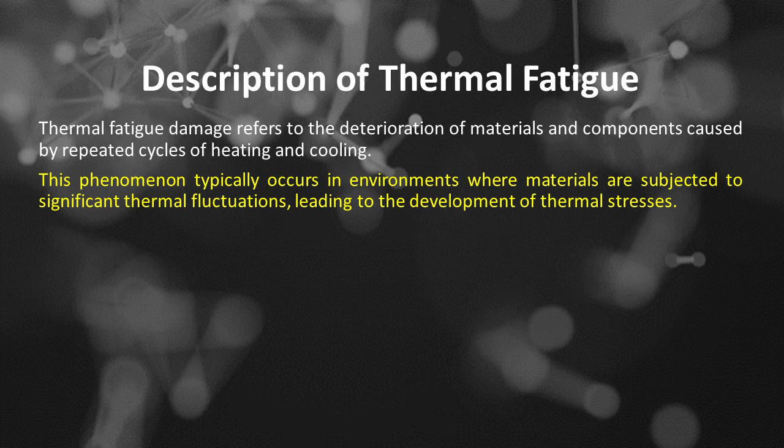Thermal fatigue damage refers to the deterioration of materials and components caused by repeated cycles of heating and cooling. This phenomenon typically occurs in environments where materials are subjected to significant thermal fluctuations, leading to the development of thermal stresses. As materials expand when heated and contract when cooled, the repetitive nature of these expansions and contractions can result in the formation of microscopic cracks and other structural weaknesses.

Key characteristics of thermal fatigue damage include: Number 1 is crack formation. The dominant feature of thermal fatigue is the growth of cracks, which may initiate at points of high stress or defects in the material. These cracks can expand over time, ultimately leading to structural failure.

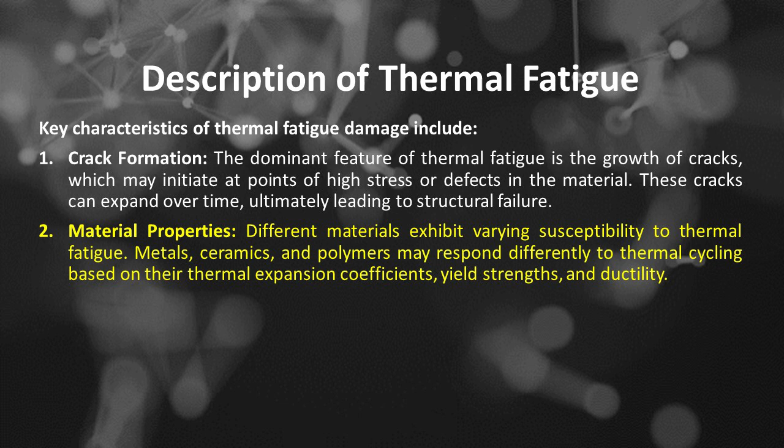Number 2 is material properties. Different materials exhibit varying susceptibility to thermal fatigue. Metals, ceramics, and polymers may respond differently to thermal cycling based on their thermal expansion coefficients, yield strengths, and ductility.

Number 3 is temperature range. Thermal fatigue is particularly significant in applications where materials experience high temperatures, such as in engines, turbines, heat exchangers, and various industrial processes. Number 4 is thermal cycling.

The frequency and magnitude of thermal cycles significantly influence the extent of thermal fatigue damage. Frequent and intense cycling can accelerate damage accumulation.

Number 5 is environmental factors. Other factors, including oxidation, corrosion, and mechanical loading, can exacerbate thermal fatigue damage, particularly in harsh operating conditions.

Number 6 is loading pattern. Repeated cycles of loading and unloading, rather than a single, monotonic loading, increase the likelihood of thermal fatigue damage.

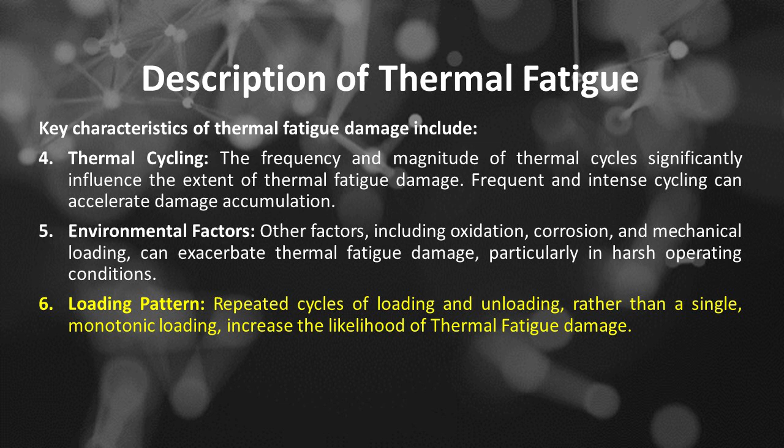Number 7 is frequency and duration. Higher frequency and longer duration of temperature fluctuations can accelerate material degradation.

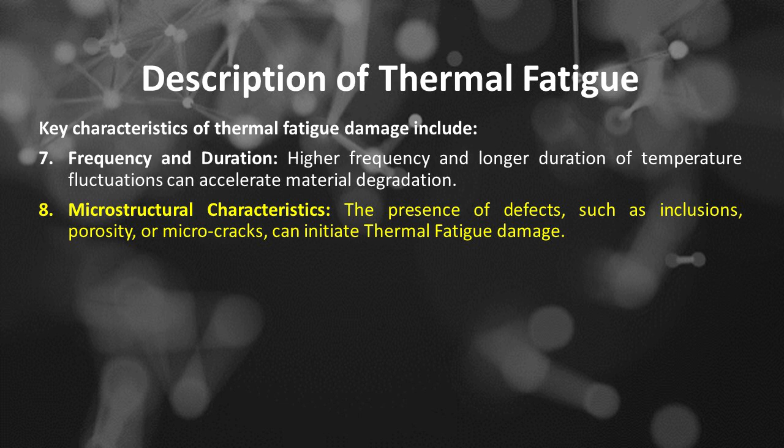Number 8 is microstructural characteristics. The presence of defects, such as inclusions, porosity, or microcracks, can initiate thermal fatigue damage.

Number 9 is detection and monitoring. Identifying thermal fatigue damage often requires techniques such as non-destructive testing, NDT, methods, including ultrasonic testing, visual inspections, and thermography, to assess the integrity of affected structures.

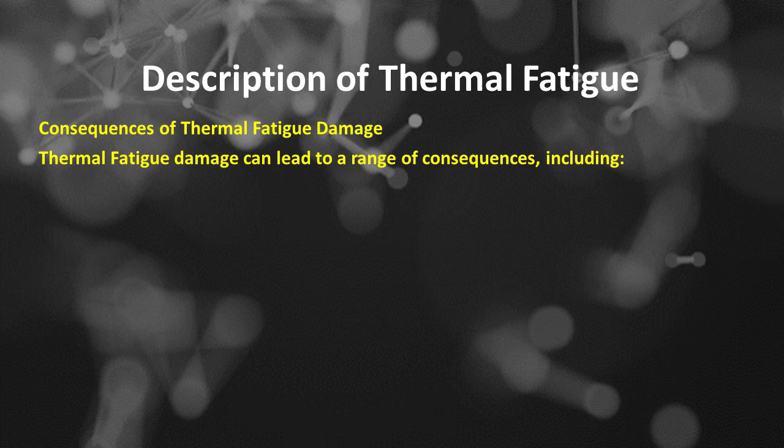Consequences of thermal fatigue damage. Thermal fatigue damage can lead to a range of consequences, including: Number 1 is reduced material strength. Decreased material strength can compromise the structural integrity of components.

Number 2 is fatigue life reduction. Materials with thermal fatigue damage may fail prematurely, leading to catastrophic failures.

Number 3 is material embrittlement. Long-term exposure to thermal fluctuations can lead to material embrittlement, making it more prone to brittle failure.

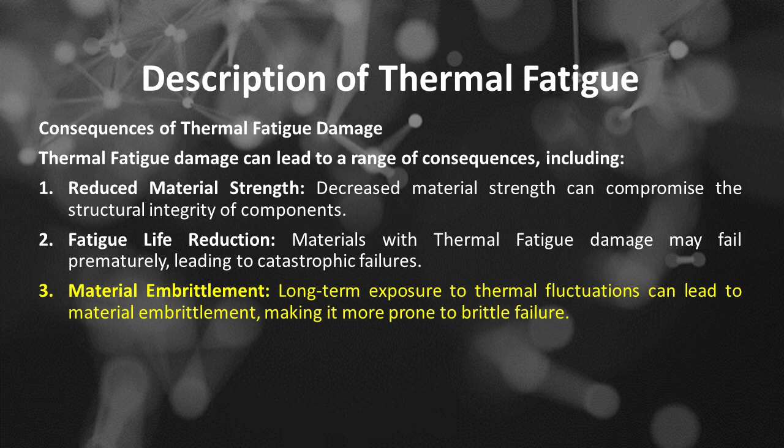Number 4 is corrosion and cracking. Thermal fatigue damage can create an environment conducive to corrosion and cracking.

In summary, thermal fatigue damage is a critical consideration in engineering and materials science, particularly for components exposed to cyclic thermal environments. Understanding its mechanisms and implementing strategies for assessment and prevention are essential for ensuring the reliability and longevity of materials and structures in use.

Thermal fatigue affected materials based on API 571. All materials of construction. Thermal fatigue is a damage mechanism that occurs in materials subjected to cyclic thermal loads, leading to the development of cracks and eventual failure.

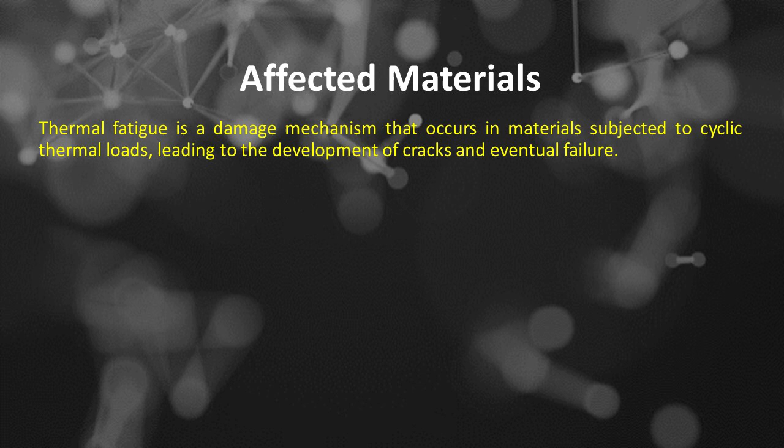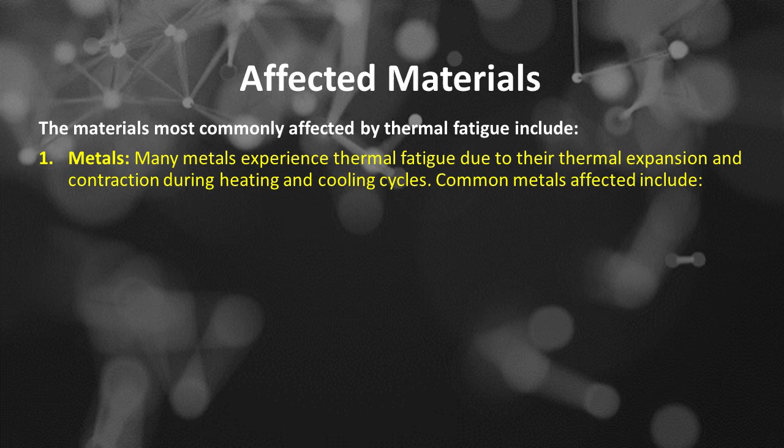The materials most commonly affected by thermal fatigue include: Number 1 is metals. Many metals experience thermal fatigue due to their thermal expansion and contraction during heating and cooling cycles. Common metals affected include: the first is steel, such as in power generation, automotive, and aerospace applications.

The second is aluminum and aluminum alloys, used in aerospace and automotive applications. The third is nickel-based superalloys, used in high-temperature environments such as turbines.

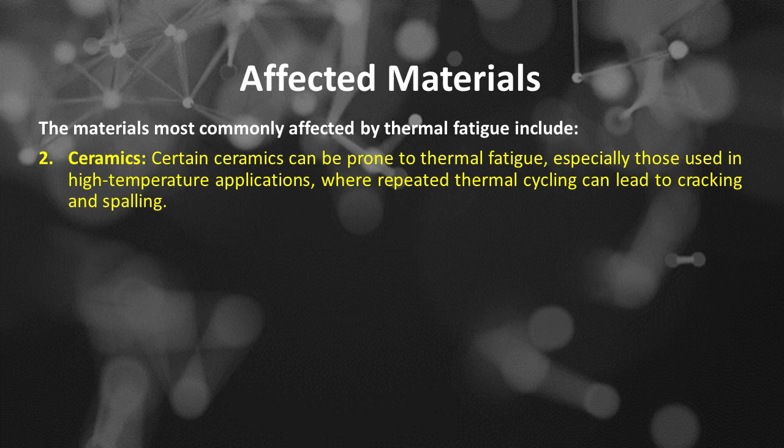Number 2 is ceramics. Certain ceramics can be prone to thermal fatigue, especially those used in high-temperature applications, where repeated thermal cycling can lead to cracking and spalling.

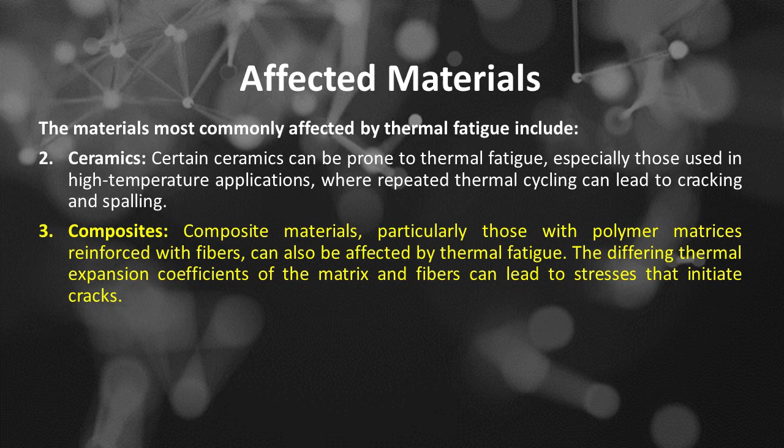Number 3 is composites. Composite materials, particularly those with polymer matrices reinforced with fibers, can also be affected by thermal fatigue. The differing thermal expansion coefficients of the matrix and fibers can lead to stresses that initiate cracks.

Number 4 is graphite and carbon-based materials. These materials can also show thermal fatigue behavior, especially in applications involving thermal cycling and high temperatures.

Number 5 is polymers. While often not thought of in the context of thermal fatigue, some polymers can experience fatigue under temperature fluctuations, particularly thermoplastic materials.

In case of thermal fatigue, it is a damage mechanism that occurs when a material is subjected to repeated thermal cycles, resulting in the material's microstructure degrading over time.

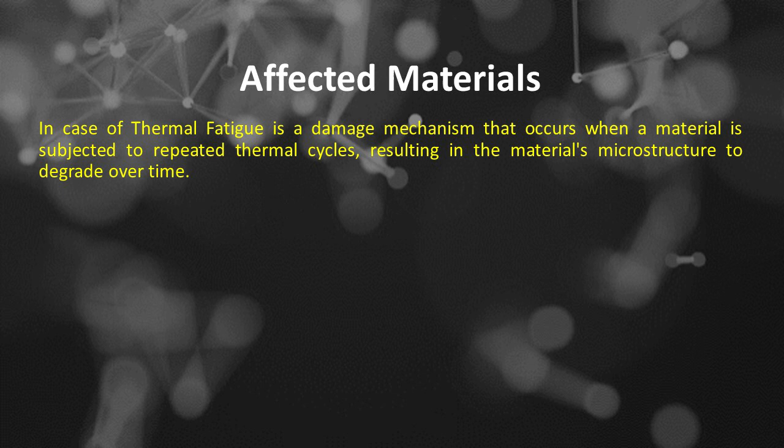The affected materials of thermal fatigue might be generally divided into two categories. Number 1 is high-temperature materials.

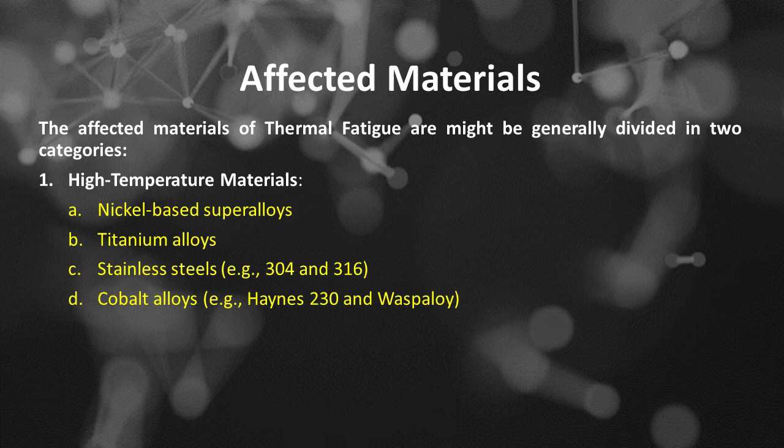The first is nickel-based superalloys. The second is titanium alloys. The third is stainless steels, such as 304 and 316. And the fourth is cobalt alloys, such as Haynes 230 and Waspaloy.

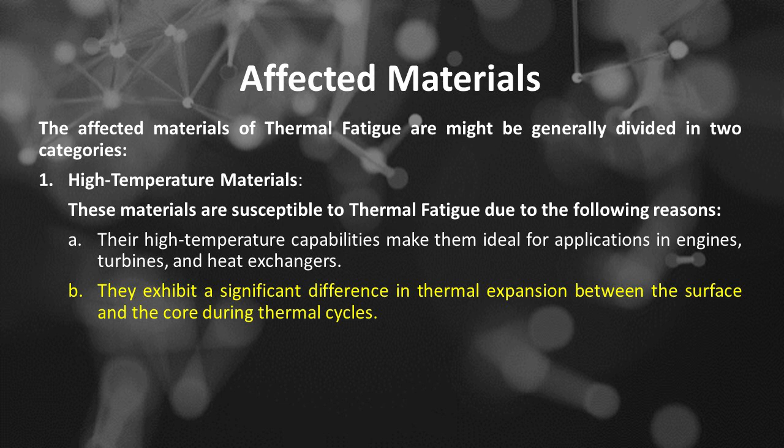These materials are susceptible to thermal fatigue due to the following reasons. First, their high-temperature capabilities make them ideal for applications in engines, turbines, and heat exchangers. Second, they exhibit a significant difference in thermal expansion between the surface and the core during thermal cycles. Third, their high strength and high temperature resistance make them prone to creep and stress rupture under thermal stresses.

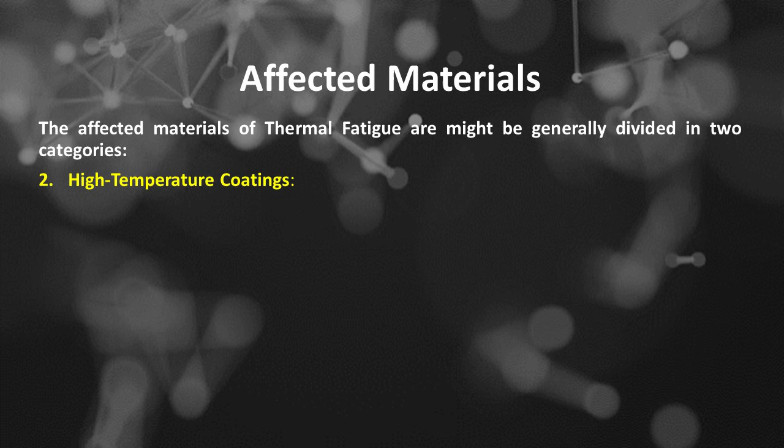Number 2 is high-temperature coatings. The first is thermal barrier coatings, or TBCs, based on yttria-stabilized zirconia, or YSZ. The second is rare earth oxide-based thermal barrier coatings, or TBCs.

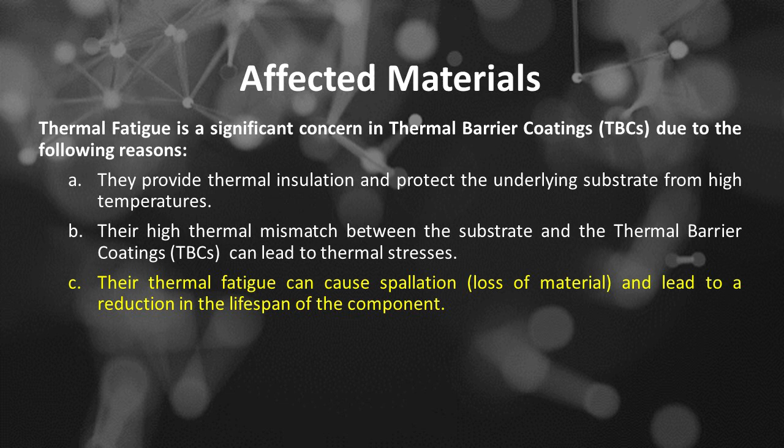Thermal fatigue is a significant concern in thermal barrier coatings due to the following reasons. First, they provide thermal insulation and protect the underlying substrate from high temperatures. Second, the high thermal mismatch between the substrate and the TBCs can lead to thermal stresses. Third, thermal fatigue can cause spallation, loss of material, and lead to a reduction in the lifespan of the component.

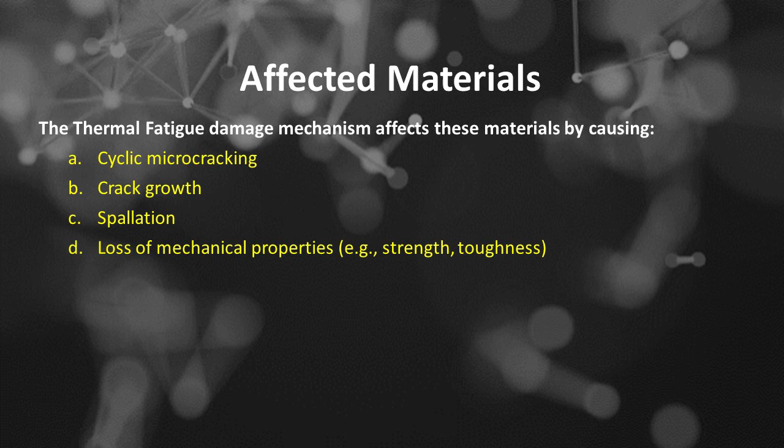The thermal fatigue damage mechanism affects these materials by causing cyclic microcracking, crack growth, spallation, and loss of mechanical properties, such as strength and toughness. Understanding the effects of thermal fatigue on these materials is essential to design and develop more durable and long-lasting components for high-temperature applications.

The susceptibility of these materials to thermal fatigue largely depends on their ability to withstand thermal stresses, their thermal expansion characteristics, and their microstructural properties. Proper material selection and design considerations are critical in applications where thermal fatigue is a concern.

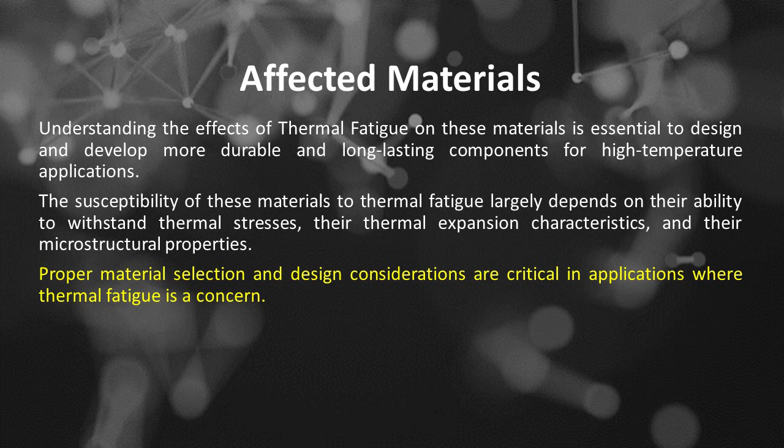Thermal fatigue critical factors. Thermal fatigue is a damage mechanism that occurs in materials subjected to cyclic thermal loading, leading to the development of cracks and eventual failure. Various critical factors contribute to the thermal fatigue damage mechanism, including number 1, temperature fluctuations.

The magnitude and frequency of temperature changes play a crucial role. Higher temperature differentials typically exacerbate thermal fatigue, as materials expand and contract more significantly.

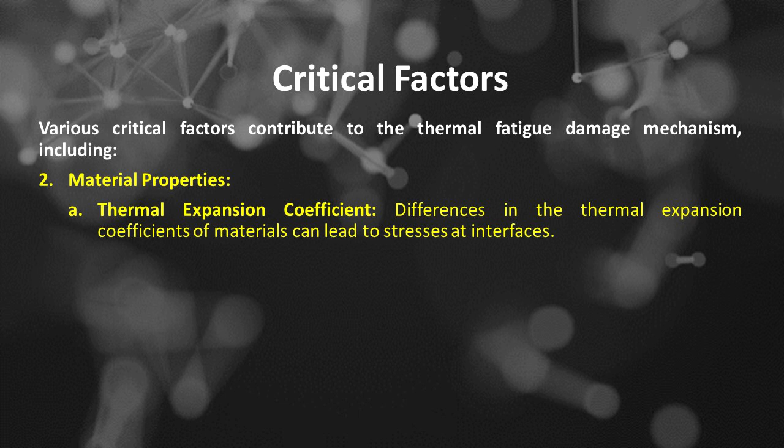Number 2 is material properties. They are the following. The first is thermal expansion coefficient. Differences in the thermal expansion coefficients of materials can lead to stresses at interfaces.

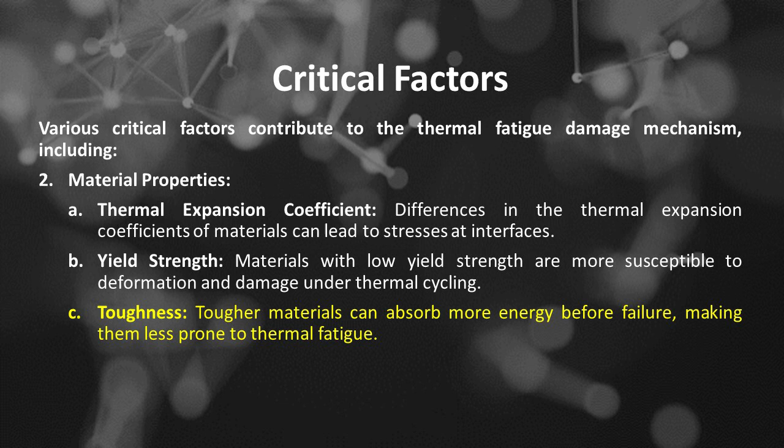The second is yield strength. Materials with low yield strength are more susceptible to deformation and damage under thermal cycling. The third is toughness. Tougher materials can absorb more energy before failure, making them less prone to thermal fatigue.

Number 3 is microstructural features. The grain size, phase distribution, and overall microstructure can influence how materials respond to thermal cycles. Certain microstructural characteristics might promote crack initiation and propagation.

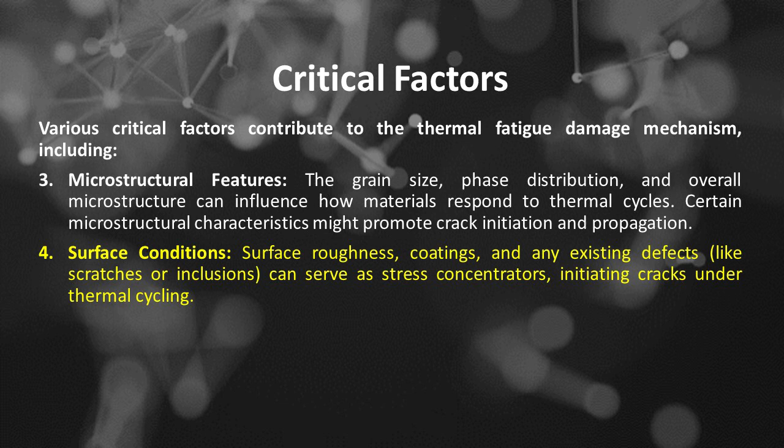Number 4 is surface conditions. Surface roughness, coatings, and any existing defects, like scratches or inclusions, can serve as stress concentrators, initiating cracks under thermal cycling. Number 5 is cycle frequency.

The rate at which temperature cycles occur can affect how much time is available for the material to relax stresses, with higher frequencies often resulting in more rapid accumulation of damage.

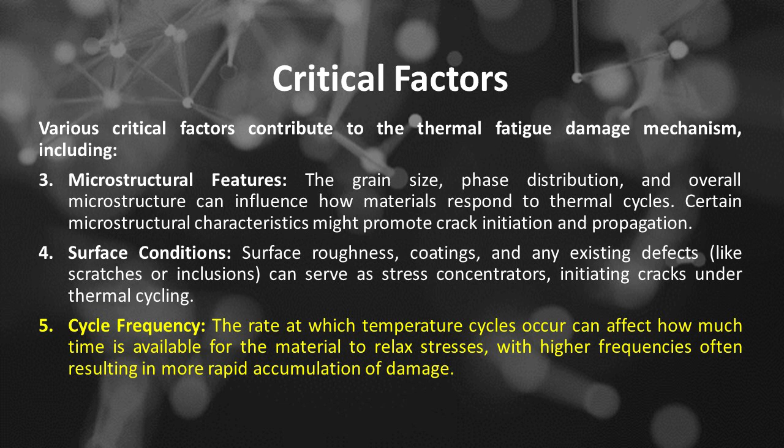Number 6 is mean temperature. The baseline temperature of operation affects the thermal stresses experienced by the material. Prolonged exposure to elevated temperatures can lead to softening and reduce resistance to fatigue.

Number 7 is loading conditions. The presence of concurrent mechanical loads, e.g., tensile, compressive, or torsional stresses, can influence thermal fatigue behavior by altering how stresses are distributed within the material.

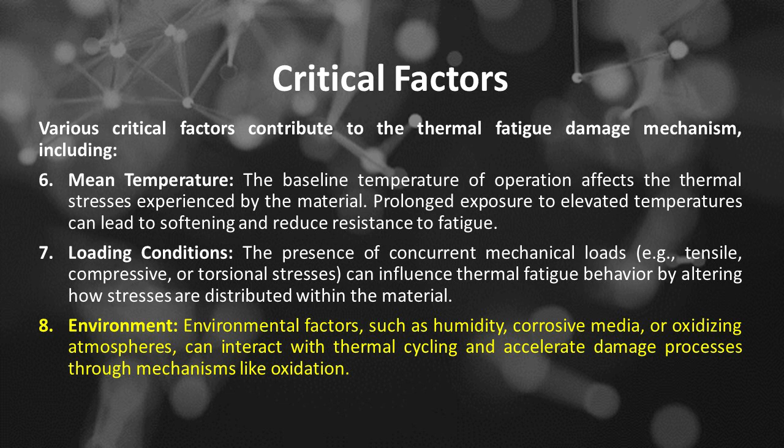Number 8 is environment. Environmental factors, such as humidity, corrosive media, or oxidizing atmospheres, can interact with thermal cycling and accelerate damage processes through mechanisms like oxidation.

Number 9 is cyclic load history. The history of loading, including previous thermal cycles, may impact the current performance of the material, making it either more or less susceptible to additional damage.

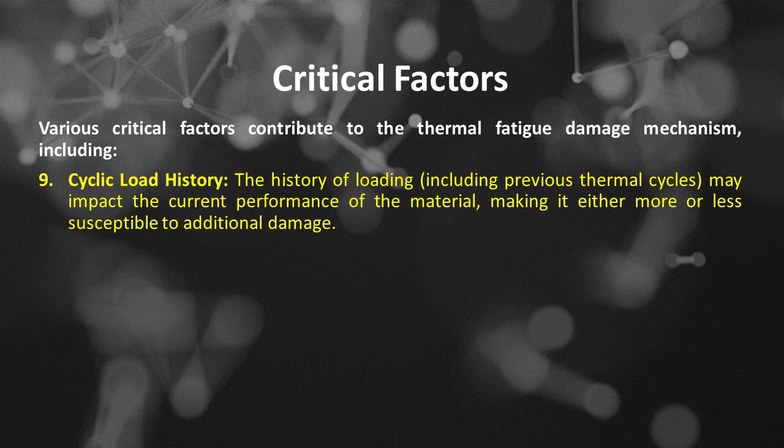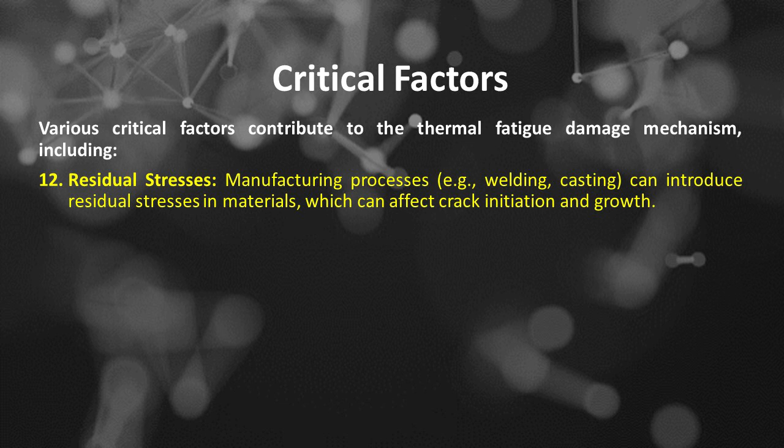Number 12 is residual stresses. Manufacturing processes, such as welding and casting, can introduce residual stresses in materials, which can affect crack initiation and growth.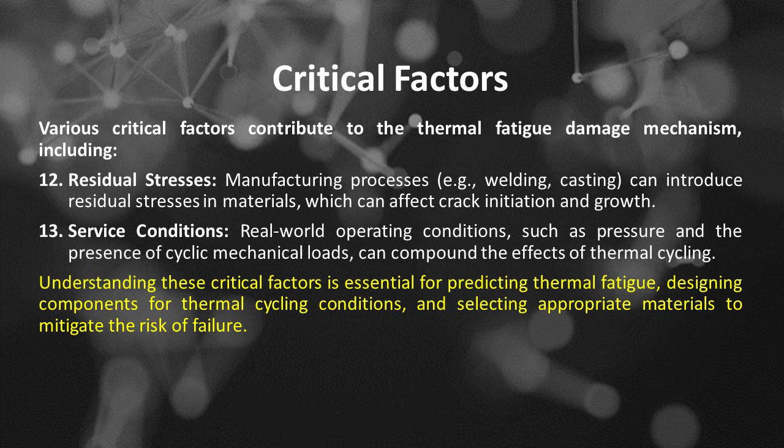Understanding these critical factors is essential for predicting thermal fatigue, designing components for thermal cycling conditions, and selecting appropriate materials to mitigate the risk of failure.

Thermal fatigue affected units or equipment based on API 571.

The first examples include mix points of hot and cold streams, such as hydrogen mix points in hydroprocessing units, and locations where condensate comes in contact with steam systems, such as desuperheating or attemperating equipment, figures 4-20 and 4-23. The second is thermal fatigue.

Cracking has been a major problem in coke drum shells. Thermal fatigue can also occur on coke drum skirts, where stresses are promoted by a variation in temperature between the drum and skirt, see figure 4-21 and figure 4-22.

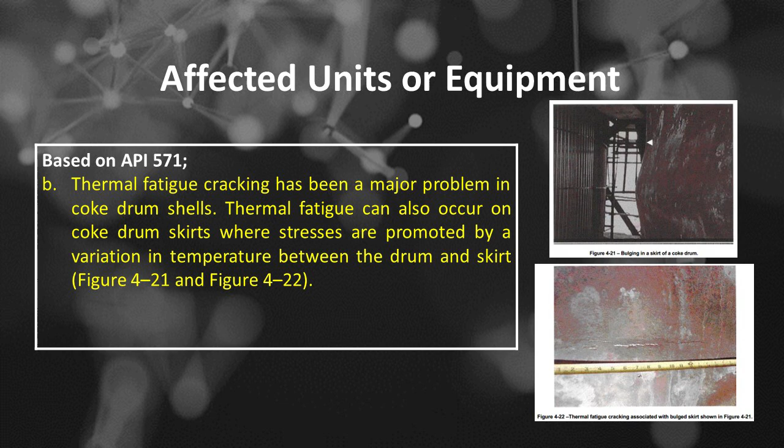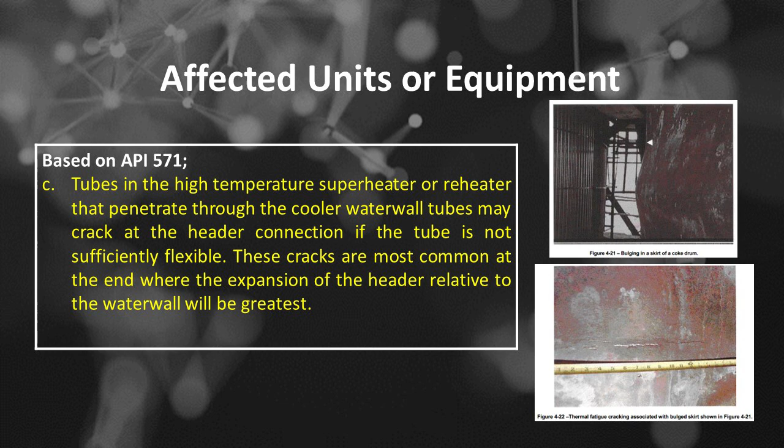The third is tubes in the high-temperature superheater or reheater that penetrate through the cooler water wall. Tubes may crack at the header connection if the tube is not sufficiently flexible. These cracks are most common at the end where the expansion of the header relative to the water wall will be greatest. The fourth is steam-actuated soot blowers, which may cause thermal fatigue damage if the first steam exiting the soot blower nozzle contains condensate.

Rapid cooling of the tube by the liquid water will promote this form of damage. Similarly, water lancing or water cannon use on waterwall tubes may have the same effect.

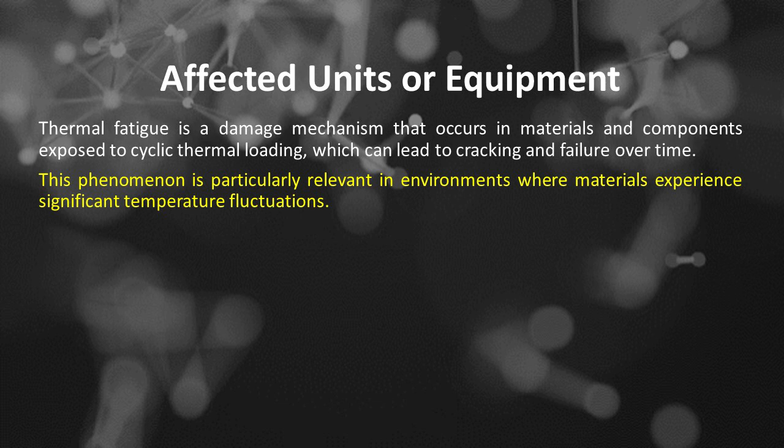Thermal fatigue is a damage mechanism that occurs in materials and components exposed to cyclic thermal loading, which can lead to cracking and failure over time. This phenomenon is particularly relevant in environments where materials experience significant temperature fluctuations.

The affected units or equipment can include: number 1 is pipelines and pressure vessels, often found in processing plants, oil refineries, and chemical plants, which may experience rapid temperature changes during operation.

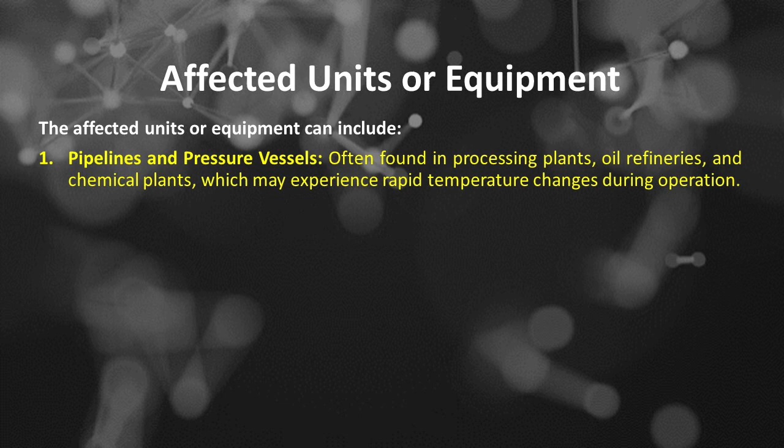Number 2 is heat exchangers and cooling systems, subject to significant temperature differences between the hot and cold fluids, leading to thermal stresses. Specific locations include heat transfer units such as coils, plates, condensers and evaporators, cooling towers, pumps and valves.

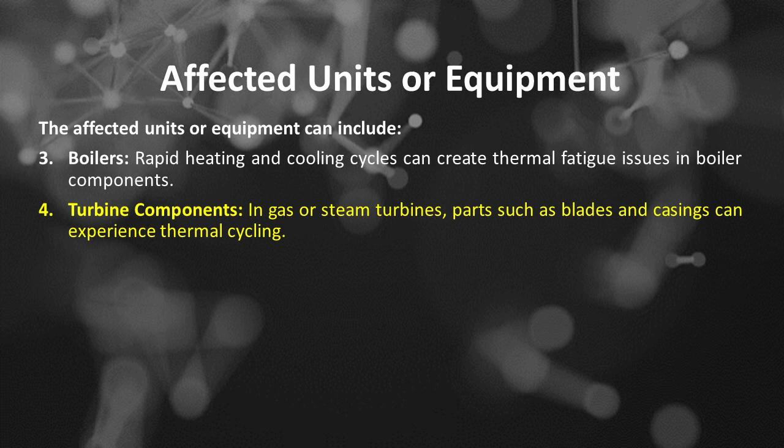Number 3 is boilers. Rapid heating and cooling cycles can create thermal fatigue issues in boiler components. Number 4 is turbine components. In gas or steam turbines, parts such as blades and casings can experience thermal cycling.

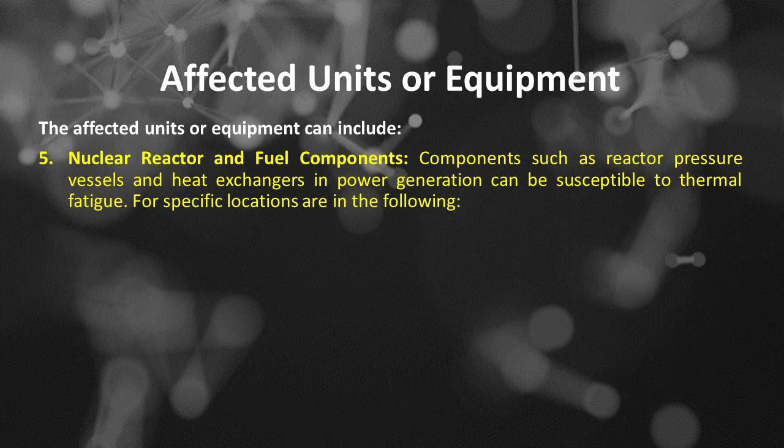Number 5 is nuclear reactor and fuel components. Components such as reactor pressure vessels and heat exchangers in power generation can be susceptible to thermal fatigue. Specific locations include fuel rods, cladding materials, control rods, and reactor vessel internals.

Number 6 is engines. Internal combustion engines, especially the cylinder heads and exhaust systems, experience rapid thermal cycling during operation. Specific locations include engine blocks, cylinder heads, engine components such as pistons, connecting rods, and propulsion system components.

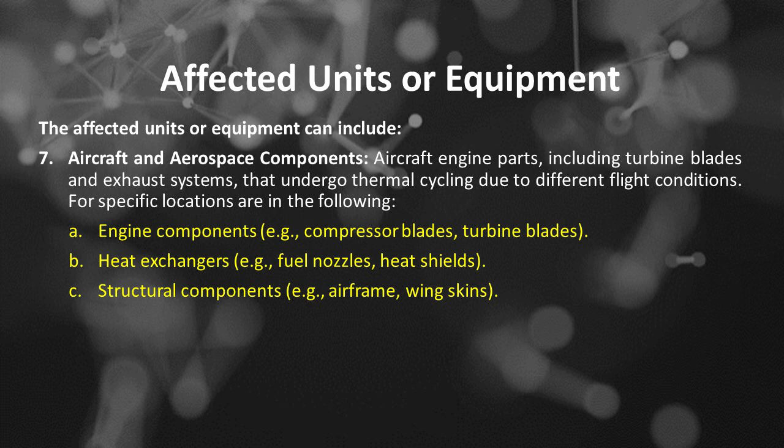Number 7 is aircraft and aerospace components. Aircraft engine parts, including turbine blades and exhaust systems, undergo thermal cycling due to different flight conditions. Specific locations include engine components such as compressor blades, turbine blades, heat exchangers such as fuel nozzles, heat shields, and structural components such as airframe and wing skins. Number 8 is industrial furnaces and ovens.

The structures or components within these systems can be affected by high temperatures and thermal cycling. Specific locations include furnace walls and doors, and boiler components such as tubes, headers, and heat transfer surfaces.

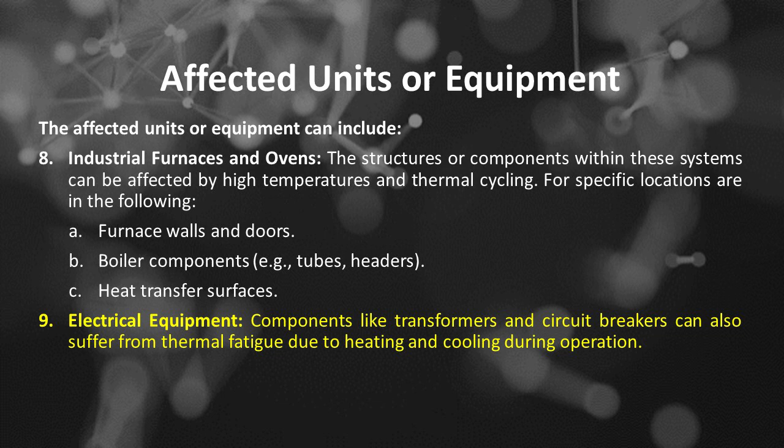Number 9 is electrical equipment. Components like transformers and circuit breakers can also suffer from thermal fatigue due to heating and cooling during operation. Thermal fatigue can lead to reduced life expectancy and failure of these components, making it essential to monitor and maintain affected equipment regularly to prevent serious outages or hazards.

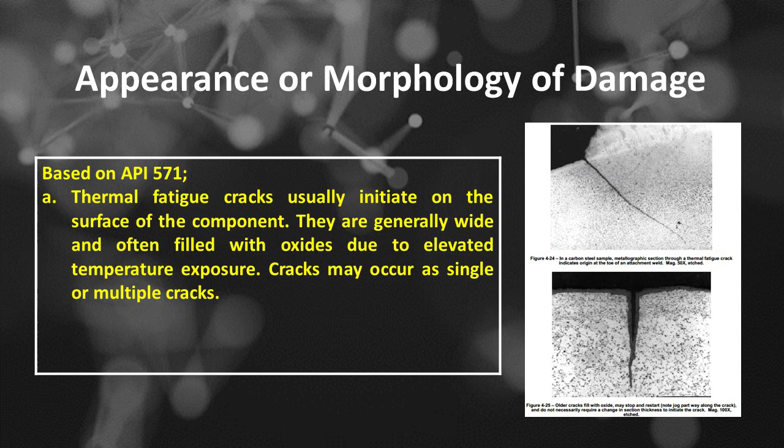Appearance or morphology of thermal fatigue damage, based on API 571. The first is thermal fatigue cracks usually initiate on the surface of the component. They are generally wide and often filled with oxides due to elevated temperature exposure. Cracks may occur as single or multiple cracks.

The second is thermal fatigue cracks propagate transverse to the stress, and they are usually dagger-shaped, transgranular, and oxide-filled, see figure 4-24 and 4-25. However, cracking may be axial or circumferential, or both, at the same location.

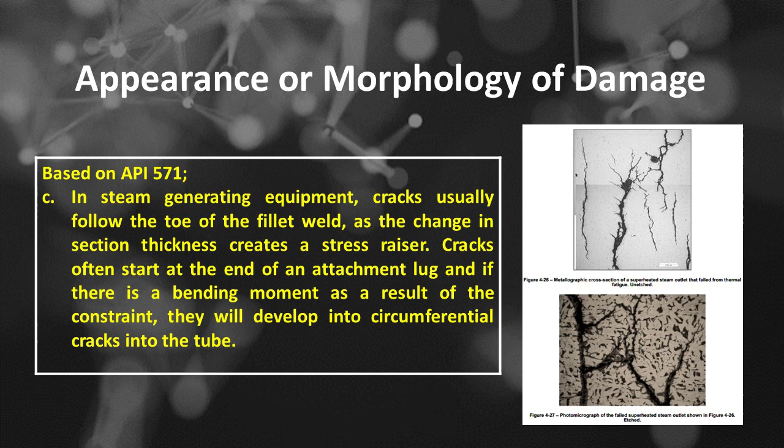The third is in steam generating equipment, cracks usually follow the toe of the fillet weld, as the change in section thickness creates a stress raiser. Cracks often start at the end of an attachment lug, and if there is a bending moment as a result of the constraint, they will develop into circumferential cracks into the tube.

The fourth is water in soot blowers may lead to a crazing pattern. The predominant cracks will be circumferential and the minor cracks will be axial, see figure 4-26 to 4-27.

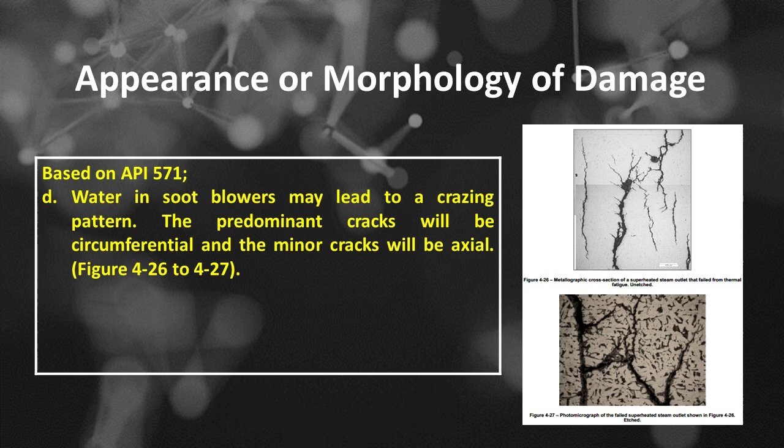Thermal fatigue is a damage mechanism that occurs due to thermal stresses induced by cyclic temperature changes. The appearance or morphology of thermal fatigue damage can vary depending on the material, temperature range, and cyclic loading conditions. Here are some common features associated with thermal fatigue damage.

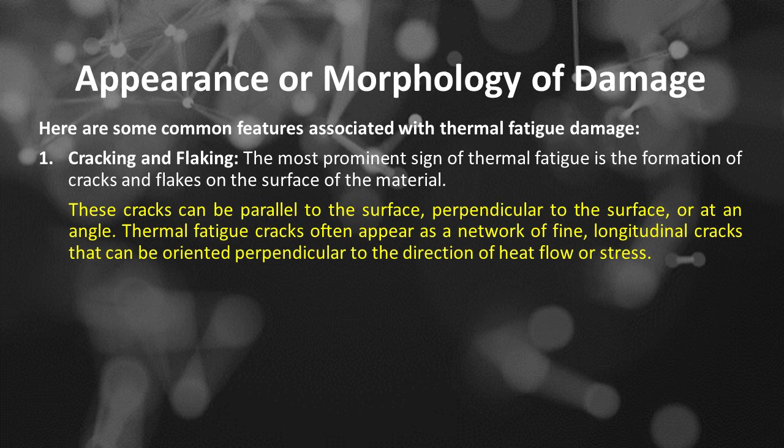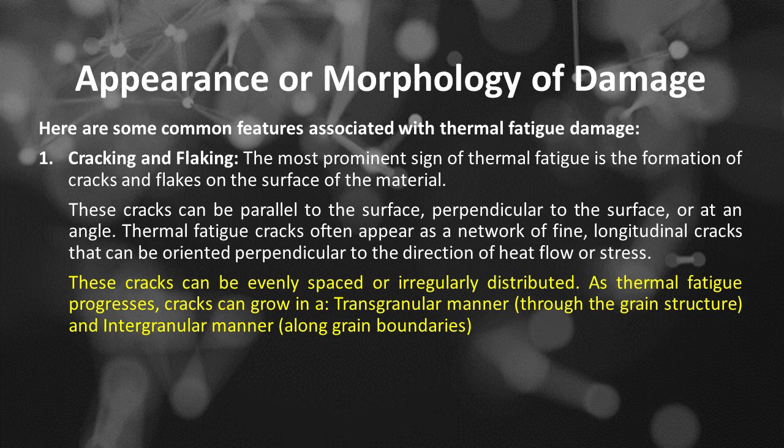Number 1 is cracking and flaking. The most prominent sign of thermal fatigue is the formation of cracks and flakes on the surface of the material. These cracks can be parallel to the surface, perpendicular to the surface, or at an angle. Thermal fatigue cracks often appear as a network of fine, longitudinal cracks oriented perpendicular to the direction of heat flow or stress. These cracks can be evenly spaced or irregularly distributed. As thermal fatigue progresses, cracks can grow in a transgranular manner, through the grain structure, and intergranular manner, along grain boundaries.

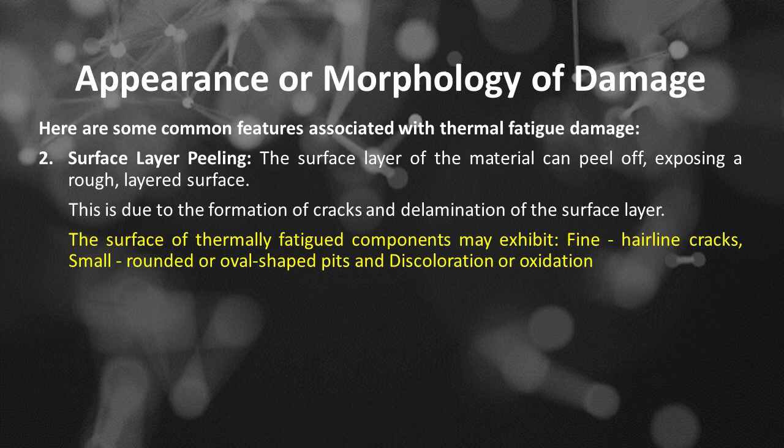Number 2 is surface layer peeling. The surface layer of the material can peel off, exposing a rough, layered surface. This is due to the formation of cracks and delamination of the surface layer. The surface of thermally fatigued components may exhibit fine, hairline cracks, small, rounded or oval-shaped pits, and discoloration or oxidation.

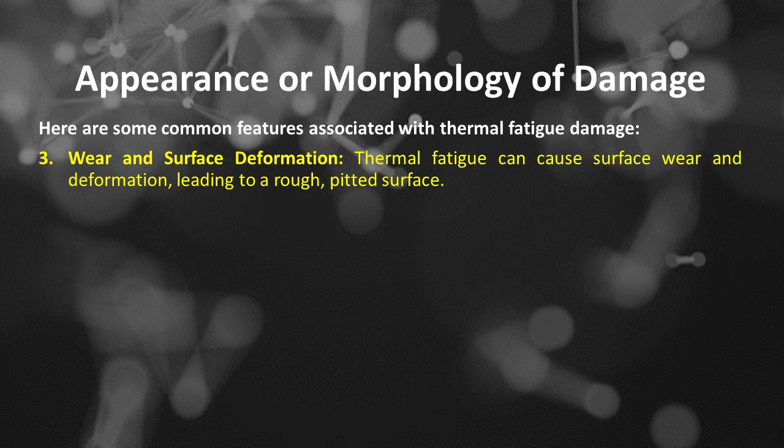Number 3 is wear and surface deformation. Thermal fatigue can cause surface wear and deformation, leading to a rough, pitted surface. Cracks typically initiate at stress concentrators such as surface roughness or scratches, material defects, e.g., inclusions, pores, welds or joints, and areas with high thermal gradients.

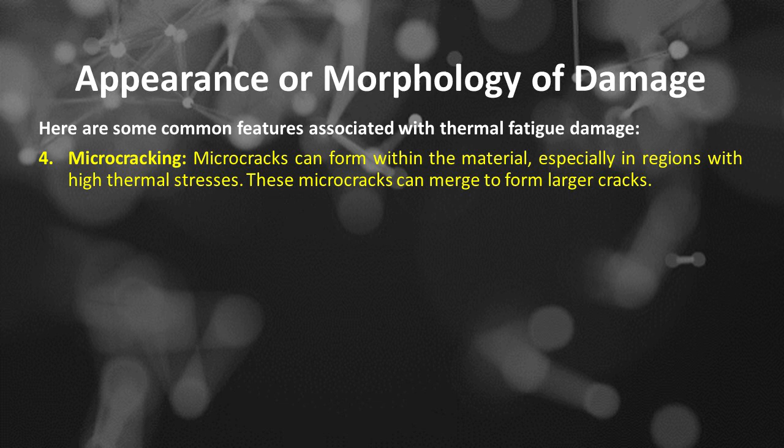Number 4 is microcracking. Microcracks can form within the material, especially in regions with high thermal stresses. These microcracks can merge to form larger cracks.

Number 5 is crazing. In some cases, thermal fatigue can cause the formation of crazes, which are small, network-like cracks that form on the surface of the material.

Number 6 is layering or stratification. Thermal fatigue can cause the formation of layers or strata on the surface of the material, as new material is deposited or formed during the cycling process.

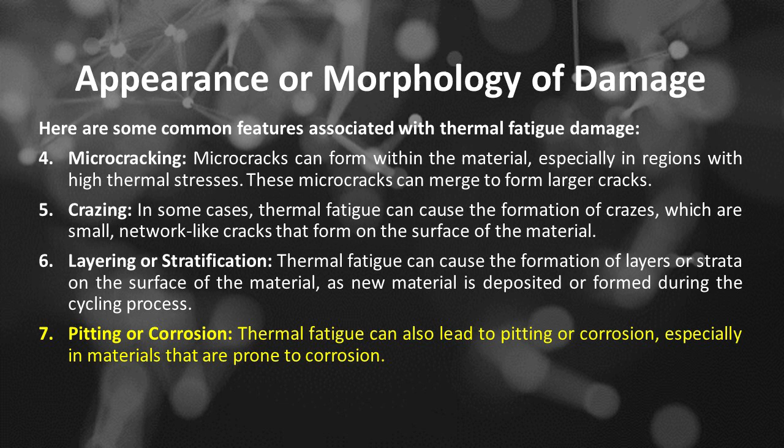Number 7 is pitting or corrosion. Thermal fatigue can also lead to pitting or corrosion, especially in materials that are prone to corrosion.

Number 8 is ratchet marks. In some cases, thermal fatigue cracks can exhibit ratchet marks or beach marks, which are characteristic markings that indicate the progression of crack growth.

Number 9 is material degradation. Repeated thermal cycling can lead to material degradation, such as microstructural changes, such as grain growth, precipitation, and reduction in material properties, such as strength and toughness.

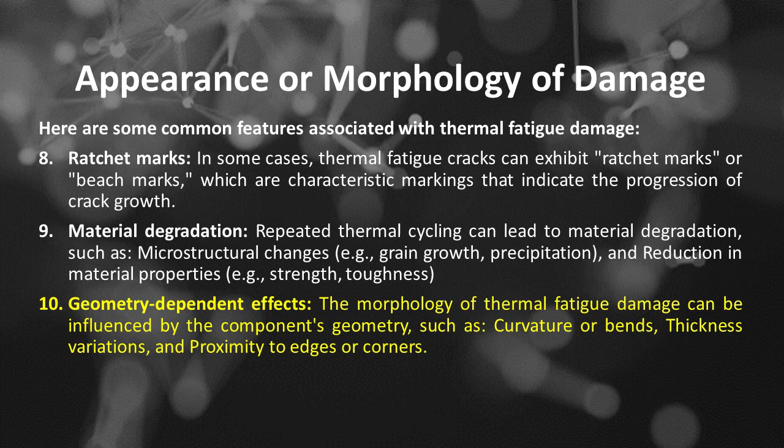Number 10 is geometry-dependent effects. The morphology of thermal fatigue damage can be influenced by the component's geometry, such as curvature or bends, thickness variations, and proximity to edges or corners.

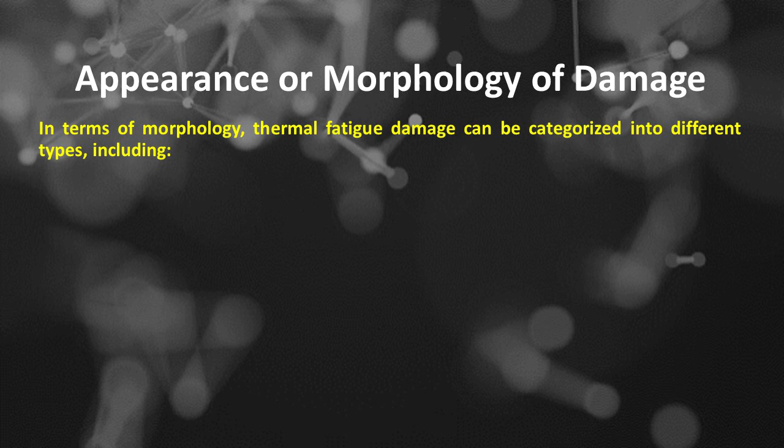In terms of morphology, thermal fatigue damage can be categorized into different types, including: Number 1 is high-temperature oxidation. This type of damage occurs when the material is exposed to high temperatures, leading to the formation of oxide layers.

Number 2 is low-temperature embrittlement. This type of damage occurs when the material becomes brittle and cracks form due to thermal stresses at low temperatures.

Number 3 is thermal shock. This type of damage occurs when the material is subjected to sudden and extreme temperature changes, leading to the formation of cracks and fractures. These are some of the common features associated with thermal fatigue damage, but the specific morphology can vary depending on the material and loading conditions.

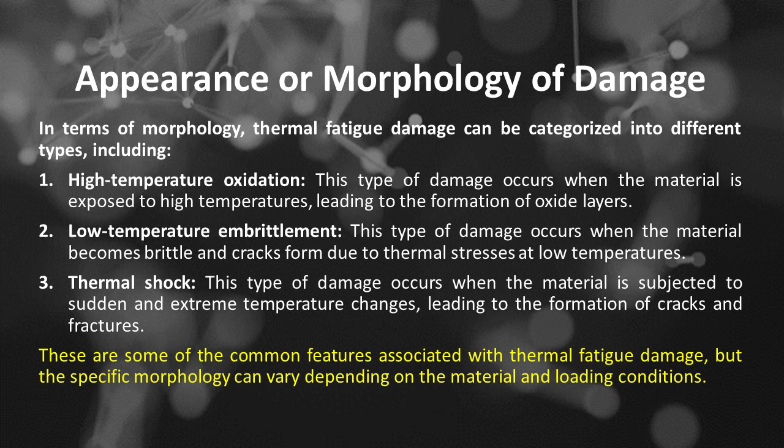Thermal fatigue damage mechanisms: prevention and mitigation. Thermal fatigue damage commonly occurs in materials and structures that experience repeated heating and cooling cycles, leading to the formation and propagation of cracks due to the stresses induced by thermal expansion and contraction.

Effective prevention and mitigation strategies include: Number 1 is prevention strategies: material selection. Choose materials that have high thermal fatigue resistance. Materials with lower coefficients of expansion and high thermal shock resistance, such as certain ceramics or advanced alloys, can be beneficial.

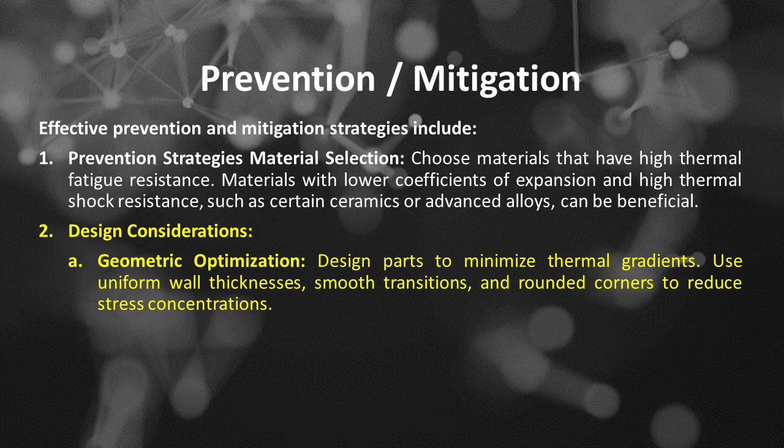Number 2 is design considerations. The first is geometric optimization. Design parts to minimize thermal gradients. Use uniform wall thicknesses, smooth transitions, and rounded corners to reduce stress concentrations.

The next design consideration is thermal insulation. Implement insulation to maintain uniform temperatures within components and minimize temperature fluctuations that can lead to thermal cycling.

Number 3 is controlled heating and cooling. First, use gradual heating and cooling processes instead of rapid changes. Controlled thermal cycling reduces the magnitude of thermal stresses.

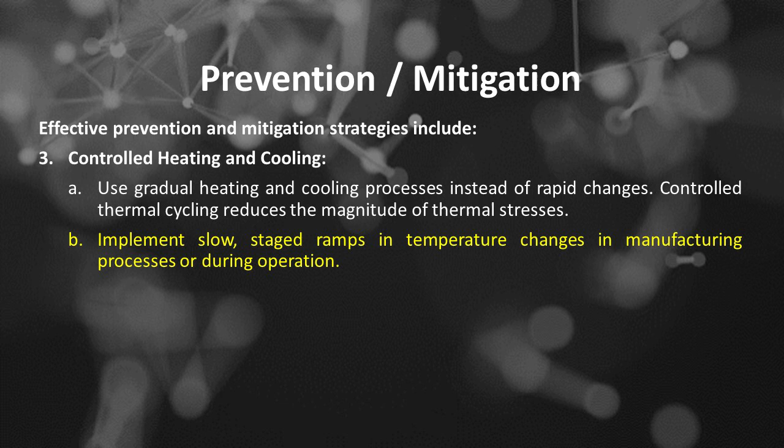The second consideration for controlled heating and cooling is to implement slow, staged ramps in temperature changes during manufacturing processes or operation. Number 4 is surface treatments. Apply coatings and surface treatments that enhance resistance to thermal fatigue. These can improve wear resistance and reduce crack initiation.

Number 5 is regular inspections and maintenance. Conduct regular inspections to detect early signs of fatigue damage, such as cracks or deformation. Scheduled maintenance can also ensure that components are operating under optimal conditions.

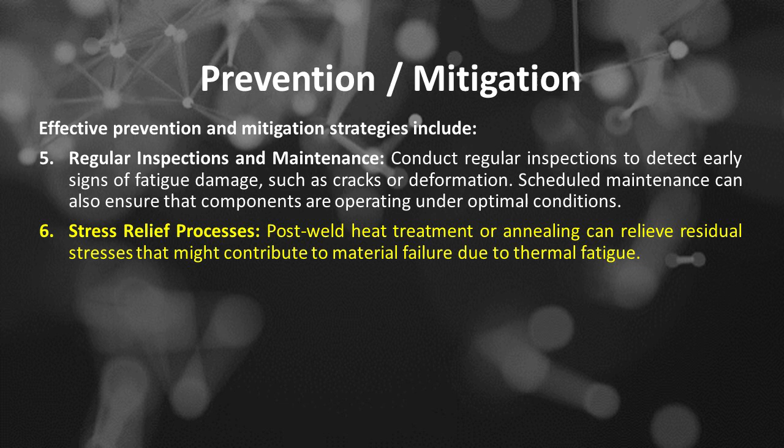Number 6 is stress relief processes. Post-weld heat treatment or annealing can relieve residual stresses that might contribute to material failure due to thermal fatigue.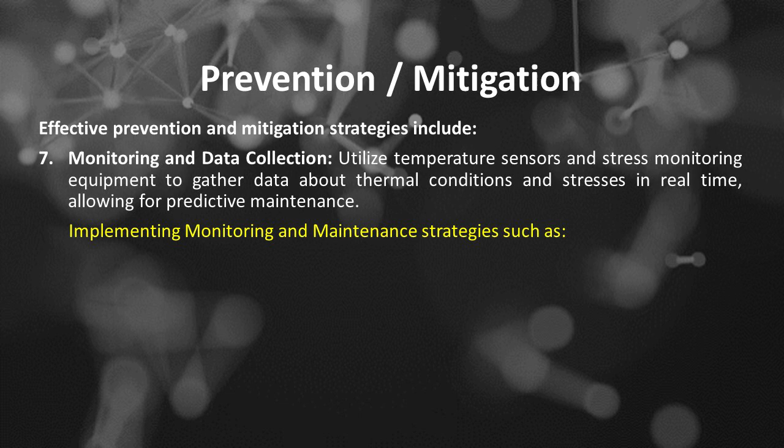Number 7 is monitoring and data collection. Utilize temperature sensors and stress monitoring equipment to gather data about thermal conditions and stresses in real time, allowing for predictive maintenance. Implementing monitoring and maintenance strategies such as: the first is regular inspections.

Routine checks for early signs of thermal fatigue such as cracks or deformations can help address problems early. The second is condition monitoring. Utilizing sensors to monitor temperature and stress can help manage thermal cycles and predict failures.

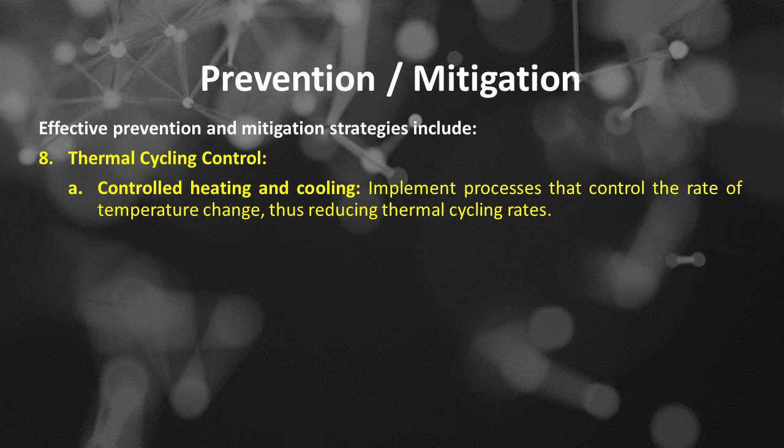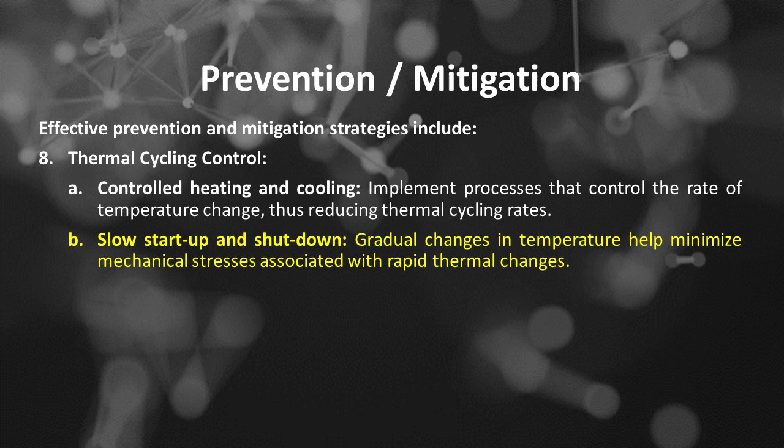Number 8 is thermal cycling control. The first is controlled heating and cooling. Implement processes that control the rate of temperature change, thus reducing thermal cycling rates. The second is slow startup and shutdown. Gradual changes in temperature help minimize mechanical stresses associated with rapid thermal changes.

Number 9 is use of coatings. Thermal barrier coatings, or TBCs, can be applied to materials to protect them from extreme temperatures, helping to reduce the thermal gradient and thermal cycling effects.

Number 10 is fatigue testing and analysis. Carry out thermal fatigue testing on materials and structures to understand their performance under thermal cycling and incorporate that data into design and operational decision-making.

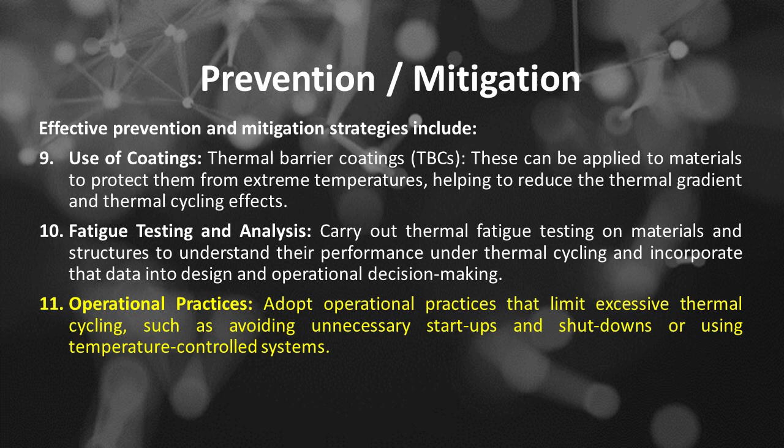Number 11 is operational practices. Adopt operational practices that limit excessive thermal cycling, such as avoiding unnecessary startups and shutdowns or using temperature-controlled systems.

By implementing these strategies, organizations can significantly reduce the risk of thermal fatigue damage, prolonging the lifespan and reliability of affected components and systems. Inspection and monitoring thermal fatigue damage mechanisms based on API 571.

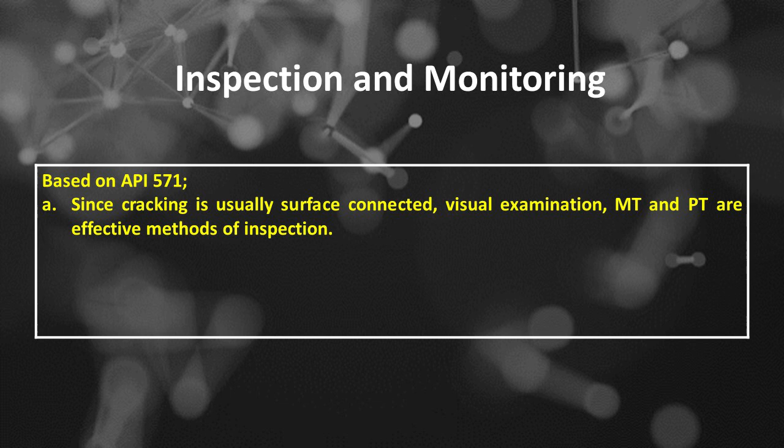Since cracking is usually surface-connected, visual examination, MT and PT are effective methods of inspection. External SWUT inspection can be used for non-intrusive inspection of internal cracking and where reinforcing pads prevent nozzle examination. Heavy wall reactor internal attachment welds can be inspected using specialized ultrasonic techniques.

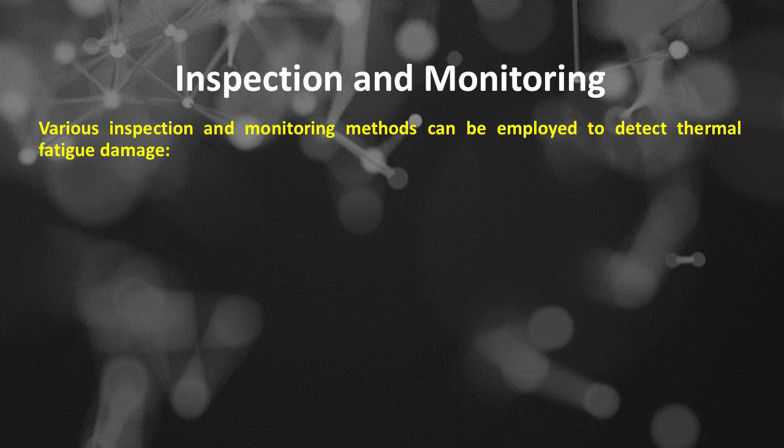Thermal fatigue occurs when materials experience repeated thermal cycles, leading to cracking and other forms of damage. Detecting such damage is crucial, especially in industries like aerospace, power generation, and automotive. Various inspection and monitoring methods can be employed to detect thermal fatigue damage.

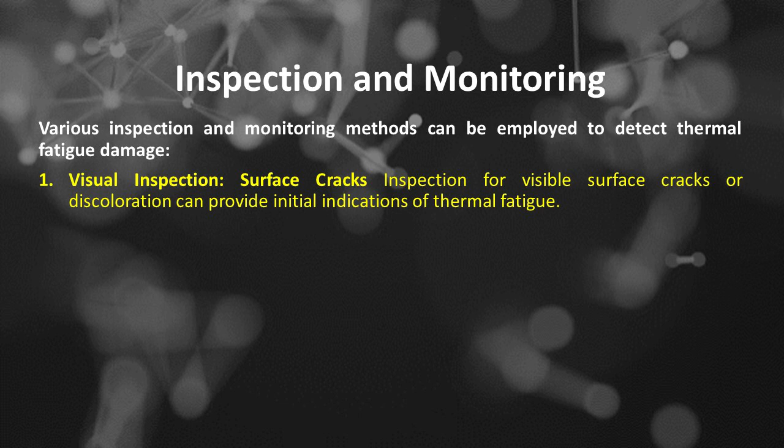Number 1 is visual inspection. Surface cracks inspection for visible surface cracks or discoloration can provide initial indications of thermal fatigue.

Number 2 is non-destructive testing, or NDT. Techniques such as dye-penetrant inspection can help highlight surface-breaking cracks. There are several methods of non-destructive testing, or NDT.

The first method is ultrasonic testing, or UT. This method uses high-frequency sound waves to detect internal flaws. It is particularly useful for identifying subsurface cracks that may develop due to thermal fatigue.

The second method is radiographic testing, RT. X-ray or gamma-ray imaging can reveal structural issues and internal cracks that are not visible on the surface.

The third method is eddy current testing. Eddy currents can detect surface and near-surface cracks in conductive materials. This method is effective in identifying changes in material properties due to thermal fatigue.

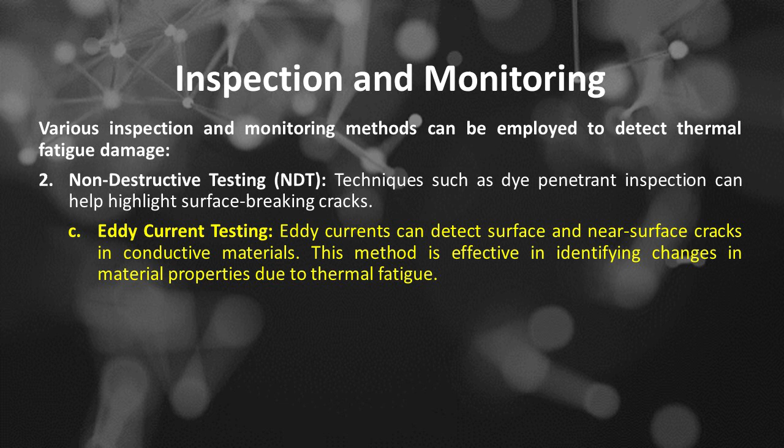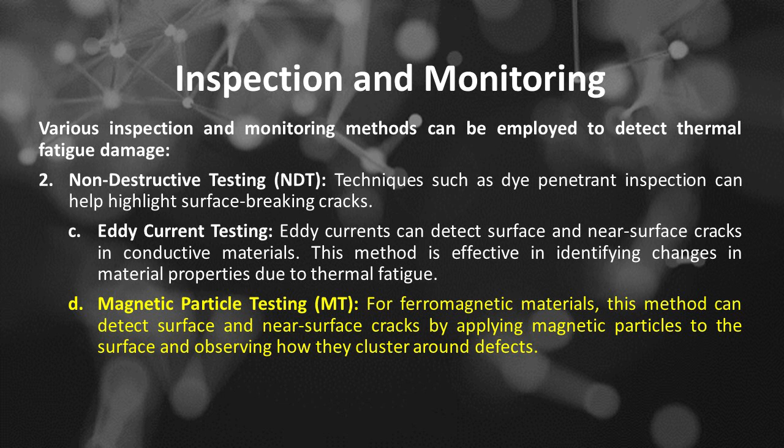The fourth method is magnetic particle testing, or MT. For ferromagnetic materials, this method can detect surface and near-surface cracks by applying magnetic particles to the surface and observing how they cluster around defects.

Number 3 is acoustic emission monitoring. This involves listening for high-frequency sound waves emitted by crack growth when the material is under stress or thermal cycling, allowing for real-time monitoring of damage progression.

Number 4 is thermography. Infrared thermography can identify temperature variations on a component's surface that may suggest underlying flaws, such as delamination or cracking resulting from thermal fatigue.

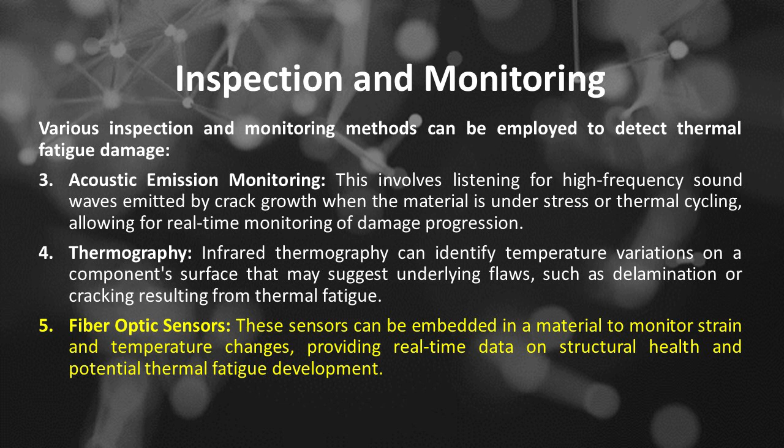Number 5 is fiber optic sensors. These sensors can be embedded in a material to monitor strain and temperature changes, providing real-time data on structural health and potential thermal fatigue development.

Number 6 is digital image correlation, or DIC. A non-contact optical method used to measure deformation and strain on a material's surface can help in understanding how thermal cycles affect structural integrity.

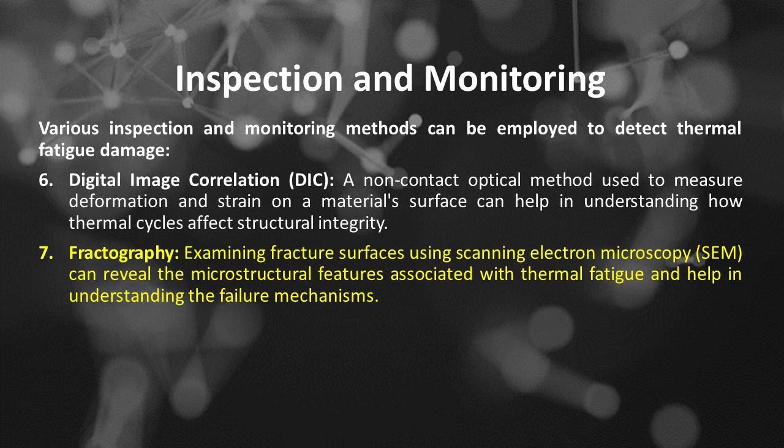Number 7 is fractography. Examining fracture surfaces using scanning electron microscopy, or SEM, can reveal the microstructural features associated with thermal fatigue and help in understanding the failure mechanisms.

Number 8 is mechanical testing. Destructive testing methods, such as fatigue tests on similar materials or components, can yield information about the material's behavior under thermal cycling.

Number 9 is finite element analysis, or FEA. While not an inspection method, FEA can be used to model thermal fatigue behavior and predict failure points in components based on operational conditions.

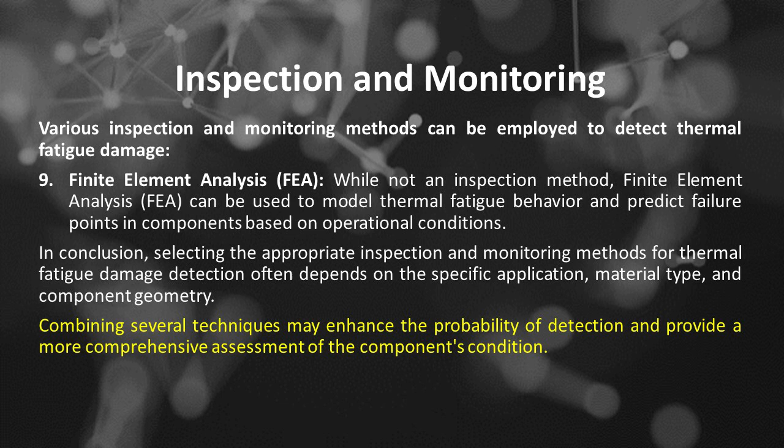In conclusion, selecting the appropriate inspection and monitoring methods for thermal fatigue damage detection often depends on the specific application, material type, and component geometry. Combining several techniques may enhance the probability of detection and provide a more comprehensive assessment of the component's condition.